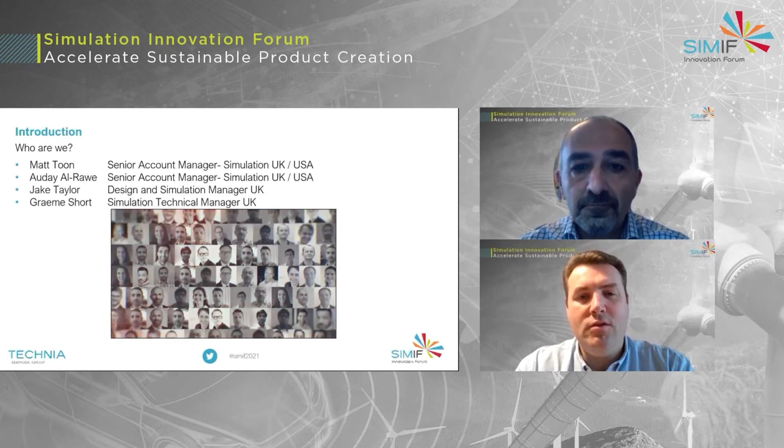As part of over 40 simulation engineers within the TECHNIA Simulation Centre of Excellence, our role is to support customers with simulation solutions in the UK and the USA. We support the full simulation solution portfolio from Dassault Systèmes to include structural, thermal, CFD, electromagnetics, optimization, etc. Our approach is always driven from our team's experience, as their day job is using the tool sets to solve real engineering problems.

Also joining us later in the presentation is Graeme Short and Jake Taylor from the TECHNIA Simulation Centre of Excellence. Today we are going to talk about why you should use simulation early in the design process and why this practice will deliver far better results in the long term.

Let's have a quick look at today's agenda. We will start by setting the scene, then we will go into what is MODSIM. It's not a software application. Why should you adopt this process? Then we get into the benefits and how could TECHNIA help you.

So, who are we? TECHNIA is a global partner for Dassault Systèmes with offices worldwide. As mentioned, TECHNIA have put together a Center of Excellences, which include simulation, engineering, and manufacturing, which all specialize in these fields. These are made up of colleagues who practice their profession daily and sharing their valuable knowledge with you, our customers, either as a service or support and training for our software solution.

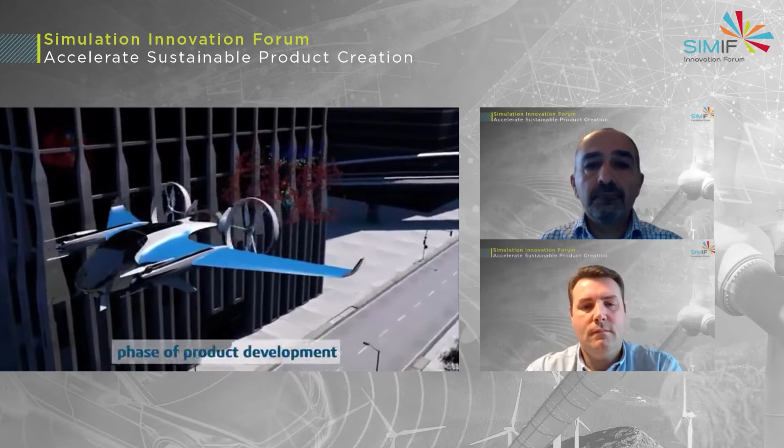Experiencing your design is made possible through seamless concurrent engineering and simulation that begins at the earliest phase of product development, enabling you to deliver the right product at the right time.

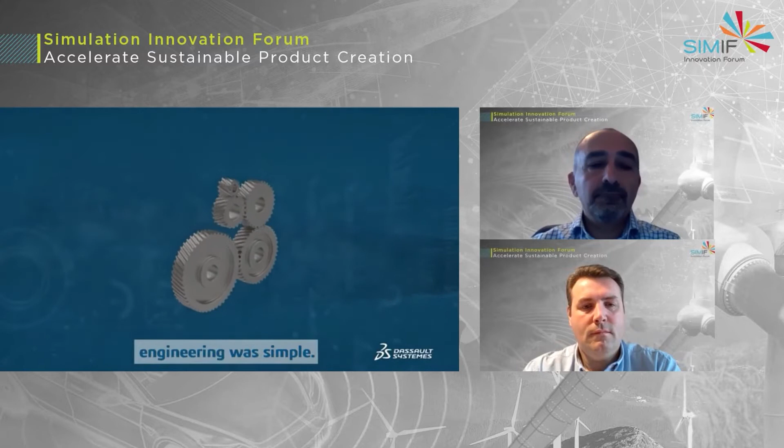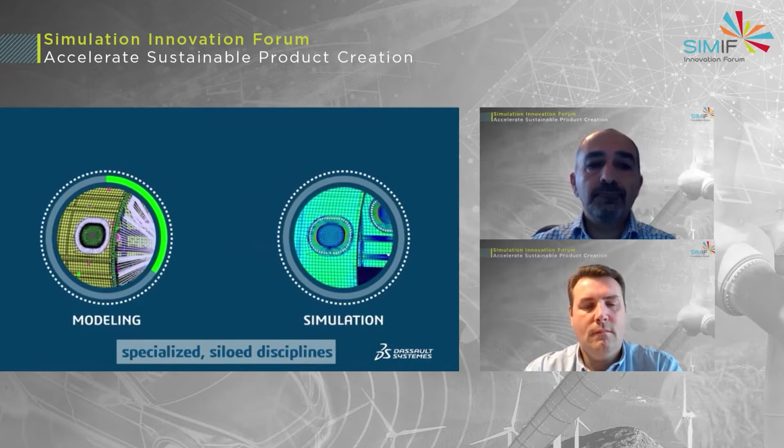When products were simple, engineering was simple. However, the increasingly complex connected products of today require engineering teams to stay one step ahead by understanding and predicting product behavior as early as possible in the development process. CAD and CAE technologies have evolved. However, engineering practices and workflows have not kept pace. Most modeling and simulation functions today perform as specialized, siloed disciplines, with each using separate, often incompatible software tools.

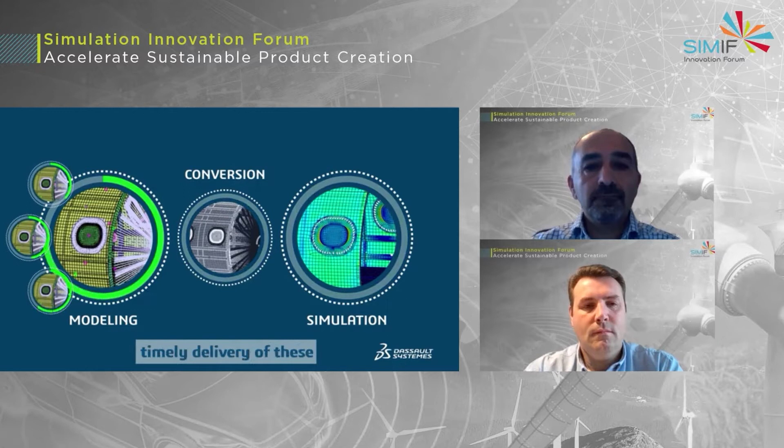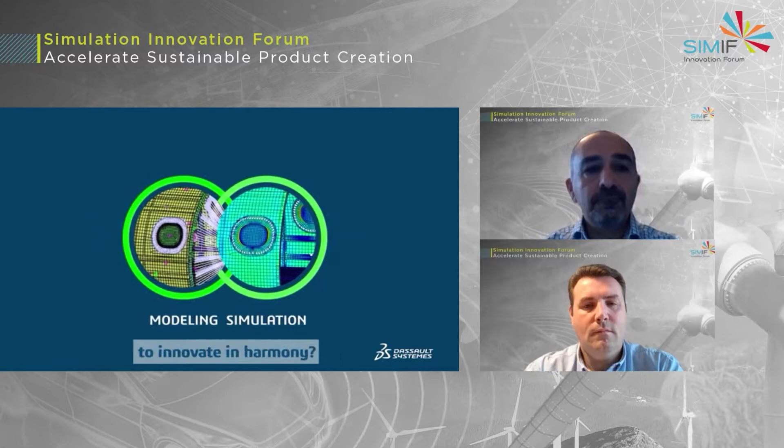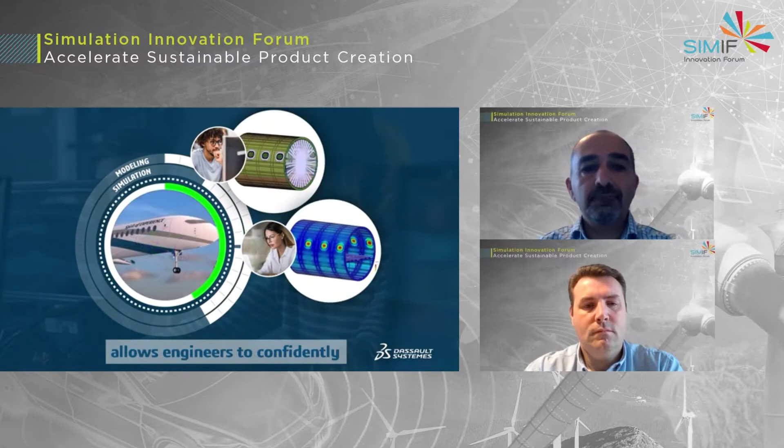When a designer shares information, that information must be translated and reworked into simulation software. Rigid handovers to analysts slow down collaboration, disrupt innovation, and prevent companies from timely delivery of these more sophisticated products without additional resources. What if you could break down the walls between disciplines and free analysts and designers to innovate in harmony? Integrated modeling and simulation, or MODSIM, makes it possible. MODSIM is a lean approach to engineering that can revolutionize the productivity of engineers and product teams. Seamless engineering, using one model and starting at the earliest phase of product development, allows engineers to confidently deliver the right product at the right time.

So at this stage, we need to clarify something. MODSIM is not a software tool, it's an engineering process.

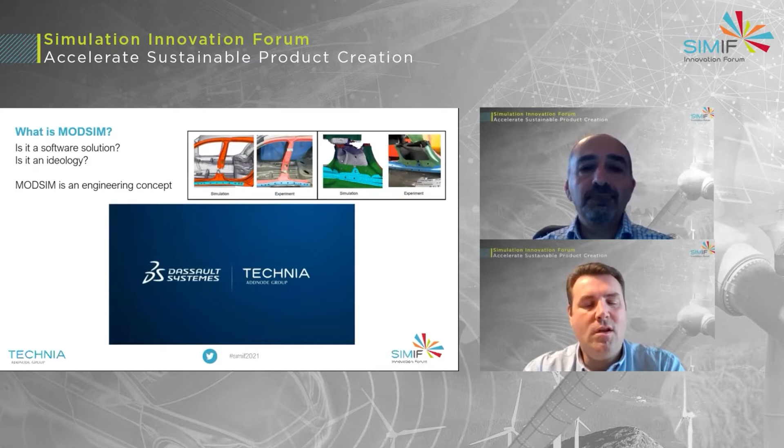If you think about your own project, then there's still lots of money committed early. However, only some 20% of time and cost has been expended. This is because fundamental decisions are made early: geometry, material, system technology, and architecture. Again, if you are making design decisions, are you validating them?

For example, you design a metal component that is stamped or starts off as a flame cut blank. Are you considering the trauma the material has gone through to make that part, and then be confident that the yield of the steel has not been compromised and can stand up to the environment you have designed it to perform in? Have you inadvertently engineered in a weakness due to the manufacturing process? My colleague Graham a little later is going to show how one feature can be the weakness in a design.

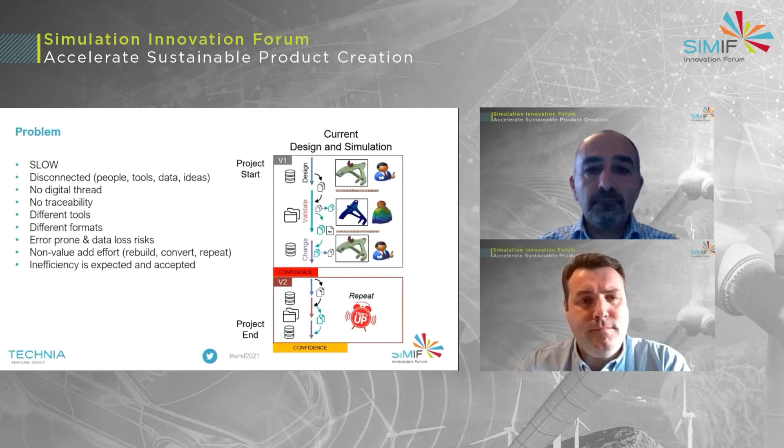So let us map this onto our earlier chart. It's obvious now that engineering changes to material, design, and manufacturing are costly - the later you need it or must react, there are high risks due to weakness found late. The cost goes up, and end consumer confidence in your product drops, especially when it hits mainstream use, like thousands of products being recalled to change brakes, brake pedals, airbags, sensors, etc.

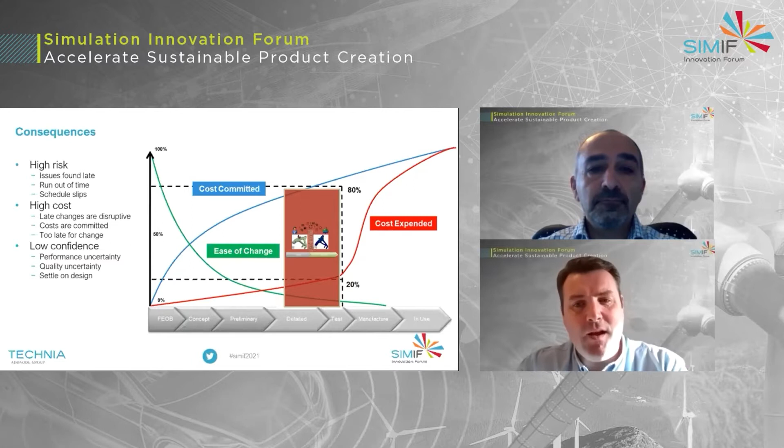Exactly, Ali. Well, I know when I read product reviews and make a purchasing judgment from them, these are heavily swayed on those performances and that reliability. And I'm sure I'm not alone in this process.

Okay, so what's the answer? Good question, Matt, I'm glad you asked. Let's look at an alternative workflow to the one we have shown earlier. We have already highlighted if you could validate design changes early with simulation, then that's a benefit.

If you could use tool sets that work with your CAD design team, manage the data, and link everyone together, then using simulation at the start and during the design process is a reality. This will then allow you to drive innovation using simulation.

If you could run a study looking at the load criteria as well as manufacturing process, considering the structural possibilities for different design choices as part of the design process, then with no doubt you are going to get a better, more robust design than previous ones. Even if you have to make a prototype, you are confident right at the beginning it's going to work and pass.

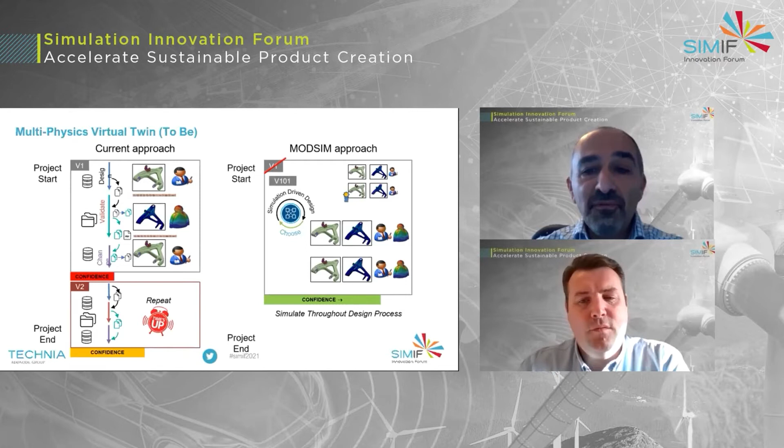So rather than doing a couple of reviews and reworks of the design, you're constantly moving the design forward. So you can end up with, say, version 101, which you are confident is your best and most robust design. Yes, absolutely, as you are improving with every engineering validated decision.

We've discussed how a MODSIM approach to a project has time-saving benefits. If this all seems daunting, then you're not on your own. As previously mentioned, TECHNIA daily practice the MODSIM process and can help you in your adoption. To get you up to speed and proficient in the new way of working, TECHNIA have the expertise and know-how to help you adopt these best practices. My colleague Jake a little later is going to outline how we can accelerate this ideology.

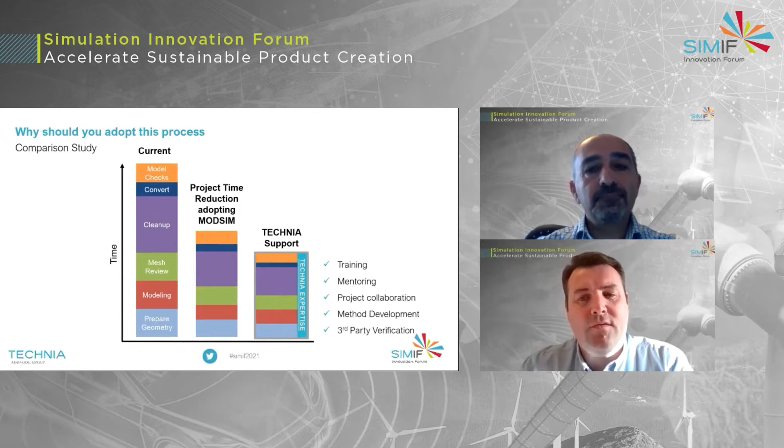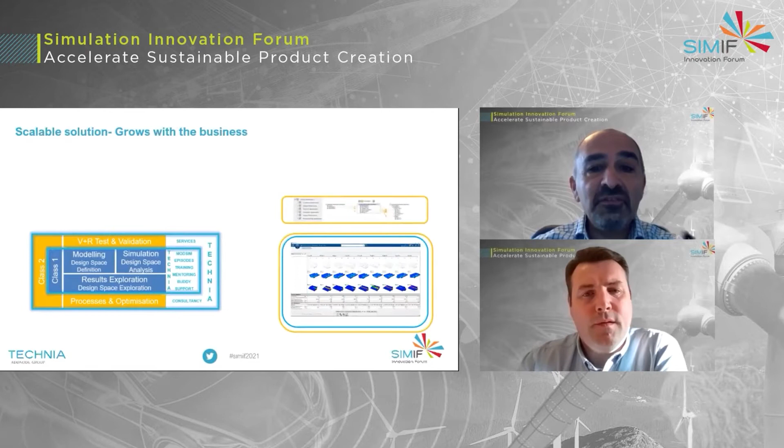So we have just shown how bringing simulation earlier into the design process brings massive benefits. But does this stop here, or does it grow with businesses? In fact, this is just the start of the journey. I will let Matt explain more.

You're quite right, Ali. There is so much more we can build on. We mentioned being able to do lots of iterations of the design, and this can be automated and optimized. In the life science industry, for example, in silico or virtual modeling brings testing and the digital twin to the levels where your final physical test is a known result.

You need to be able to control and monitor your design changes. And this is where the benefits of a PLM solution, using the 3DEXPERIENCE for example, can add value to the wider organization.

Talking of the wider organization, project management is key. Once the design is ready, it will go to manufacturing and production. All of these follow on. This can be seamlessly managed, and TECHNIA have the expertise in the wider center of excellence, as we mentioned earlier.

So, what does this mean from a software point of view? As you can see from the graph, we can keep it very simple, but the most important takeaway is it's scalable for the designer's needs. Don't forget, TECHNIA is here to guide and support you through this whole journey. I will leave this up for a few seconds just for you to digest. But let me just map where Abaqus sits on this.

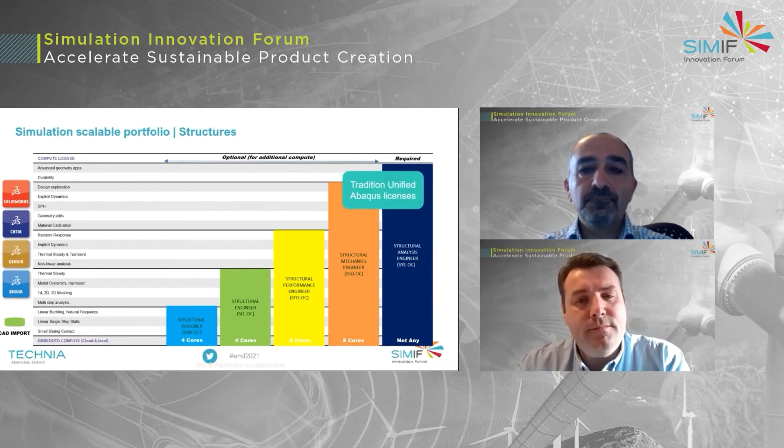Then you can see how this all sits together. Ali will now map the scalable solution to a wider business need.

Indeed, Matt. Let's take a quick look into our simulation role portfolio that forms the basis of all of our solutions. The software configuration is mapped to industry processes and solutions. As you can see, some of these roles are more targeted towards designers and product engineers, while others are targeted towards analysts.

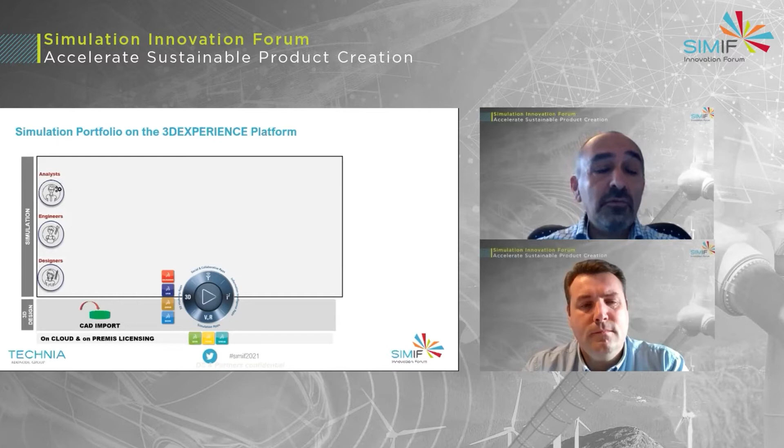We have a scalable native portfolio for core structures and durability to fit with the appropriate engineer's role and skill. We offer specialized roles for composites and manufacturing, material calibration, while model building and meshing is included with most physics roles. We also offer a standalone role for model build.

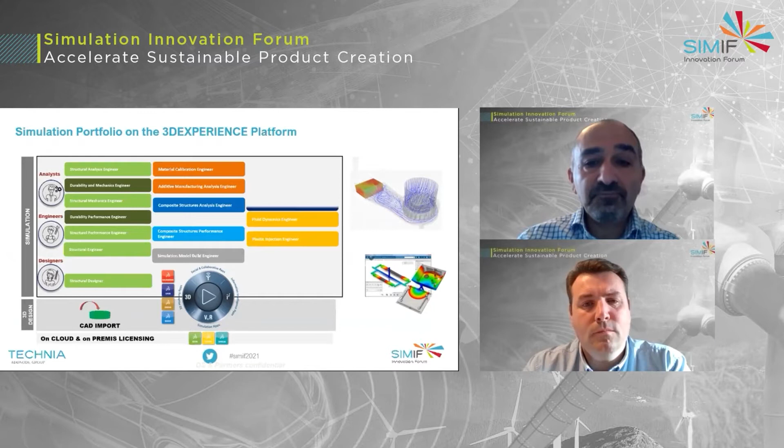We offer two native fluids roles, one for general purpose mainstream fluid markets and another for plastic injection molding solutions. We have a new electromagnetic engineer role, bringing low and high frequency electromagnetic simulation to the platform.

We have a great portfolio for generative design for structures and fluids, where designers can optimize the weight, stiffness, and performance based on the manufacturing process used. We have roles for simulation process and optimization.

Apart from the simulation role, every simulation starts from the design. The platform has native 3D design apps from SolidWorks, CATIA, but to be honest, any CAD system will work and can be used for MODSIM. The beauty about all of the above roles is they all work from the same database and no import or export is required. They are also available on either cloud or premise.

So now we've set the scene. Let's look at this from a technical point of view, starting with a simulation approach followed by a designer's approach. I'll hand over to Graeme for the next step.

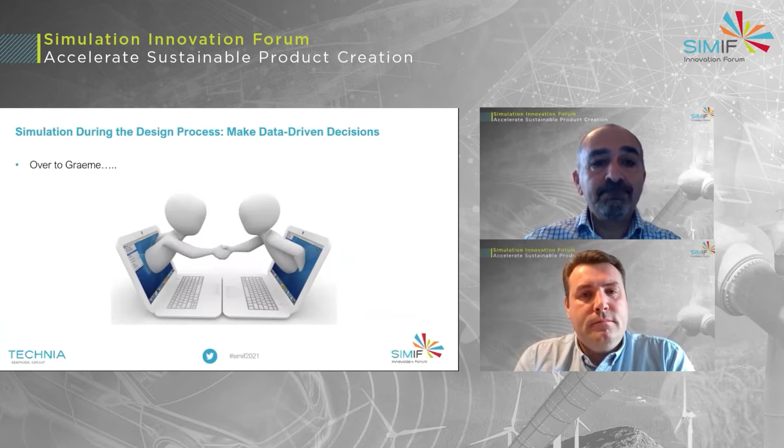Okay, so thanks to Matt and Aude for articulating why MODSIM as a process and an ideology can help make better products more efficiently. Have in mind all that they have said around the technical and business case as we now move on to look at how MODSIM could be implemented in practice.

In this next section, I want to take a look in a bit more detail at the kind of simulations that can be performed to generate information that is useful to inform design decisions early in the design cycle. The motivation for this is to minimize but not eliminate validation tests, prototyping loops, and mule testing, and so get to the solution faster.

This is the agenda for the next 20 minutes or so, during which I hope to convince you that the tools available to do this are both robust and accurate, and also simple enough to use that any overhead to the project development timeline is an investment that will pay for itself later on.

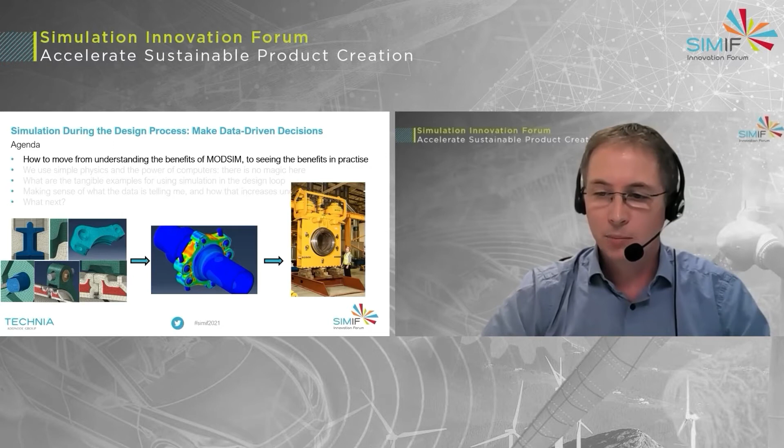Firstly, we'll explore how we move from the abstract benefits of MODSIM as a process to where it can be most effectively deployed during the design cycle, looking at how understanding more about each component and how they work together ultimately leads to a better product. Then we'll look at what exactly is happening and if we can believe numerical models of reality at all.

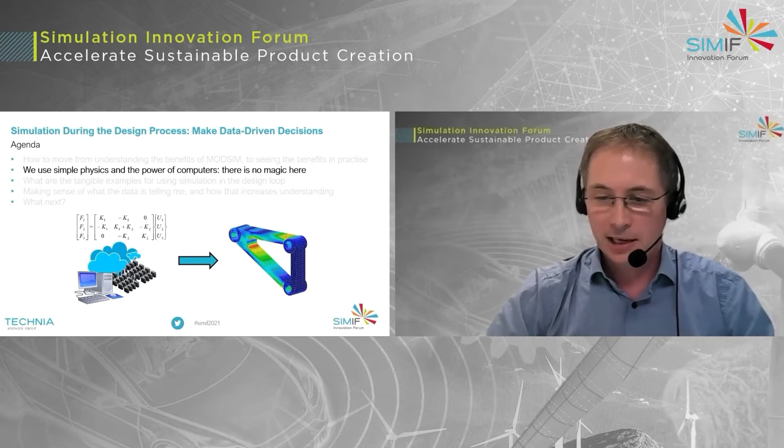Don't worry, there's no maths equations, complex science, or textbooks. We'll look at a very simple example comparing structural simulation tools with a simple physical test, focusing on why and where structural simulation tools are only an approximation of reality, but also identifying how they are more than accurate enough to be a useful equivalent of a physical test, allowing significant design decisions to be made with confidence based on the structural performance.

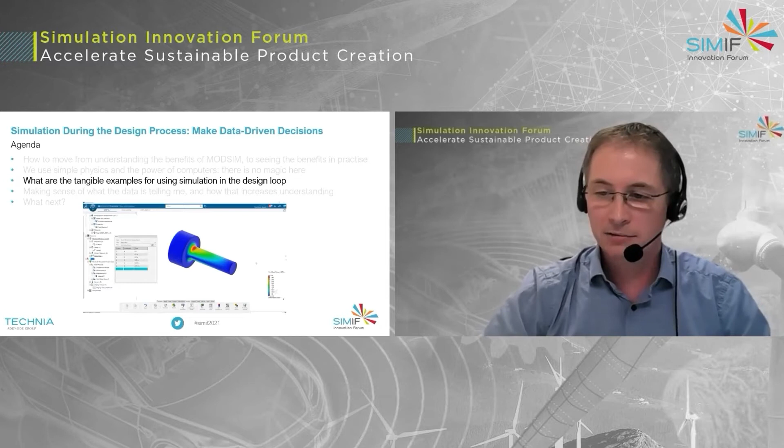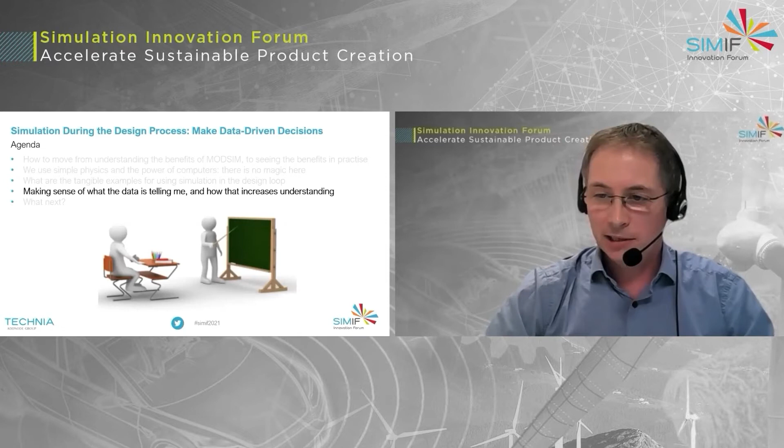Then, having convinced you all that this stuff actually works, I hope, we'll marry up these first two points to demonstrate examples of where simulation can bring real value to making decisions by adding structural performance data to back up the choices that need to be made to progress a design from idea to a production item that will perform as intended straight out of the box. While we're doing that, we'll consider not just how we get more data, but how to understand what it can mean and how to make decisions using it.

And finally, if that ticks a lot of boxes, I'll hand over to Jake, who will talk about how TECHNIA can help you deploy this mindset and tools at whatever level is right for you.

So let's look at the first of these points. How do we move from understanding the benefits of MODSIM in an abstract way to actually seeing the benefits in practice? This could be in terms of reducing time to market, lower development costs, or simply a better product, or a combination of all three if we do things well.

I think Matt and Aude make a compelling case for including simulation as part of the design cycle, not just as a specialist tool for final validation of the near production design. So how do we move from a good idea to seeing the benefits realized in practice?

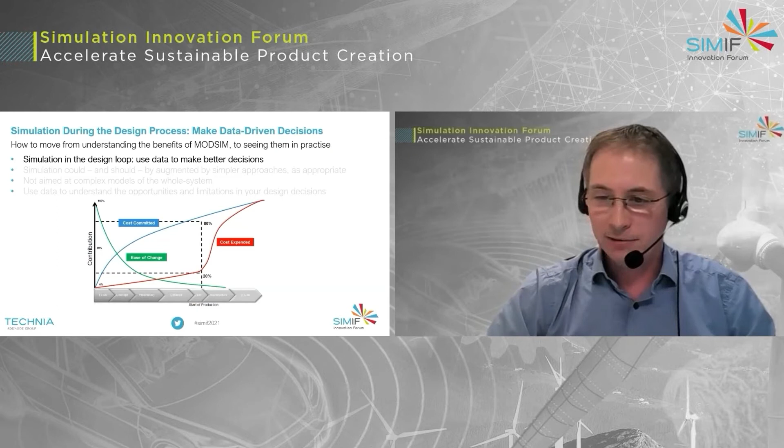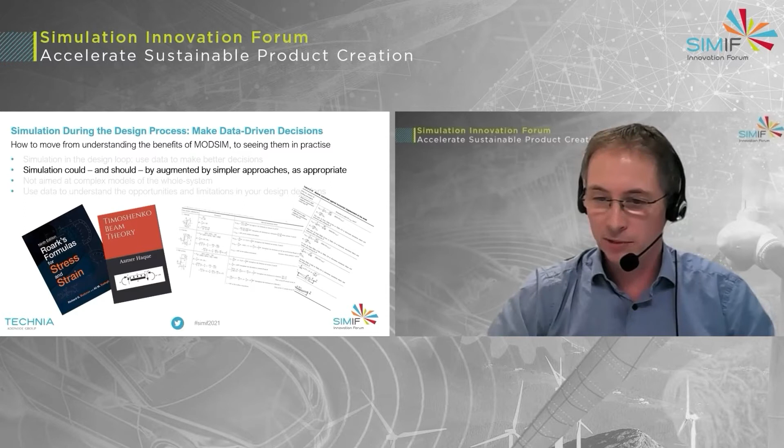As has been mentioned earlier, in the context of this presentation, we're talking about building numerical structural models based on the evolving CAD geometry of the product. This may be preceded, augmented by, or run in parallel with hand calculations or other methods to inform design decisions around the structural performance and validate the results being produced by more complex methods.

These simulations are likely to be at component, a small subassembly level, perhaps focusing more on the comparative and qualitative effects of changes in your design on the overall structural performance, rather than getting too deep into the details of every interaction, loading action, or material behavior. At this stage, we're still very much in the 80-20 stage of knowledge in terms of gathering enough data to try and understand a large area of the performance envelope for a small amount of effort.

It's also worth saying that while understanding the structural behavior of a product is undoubtedly important, there's no reason why simulations of all the physical phenomena relevant to the performance of the product can't be applied up front in the product design. That could be fluids modeling, electrical systems, electromagnetic simulations, as well as whole system level models.

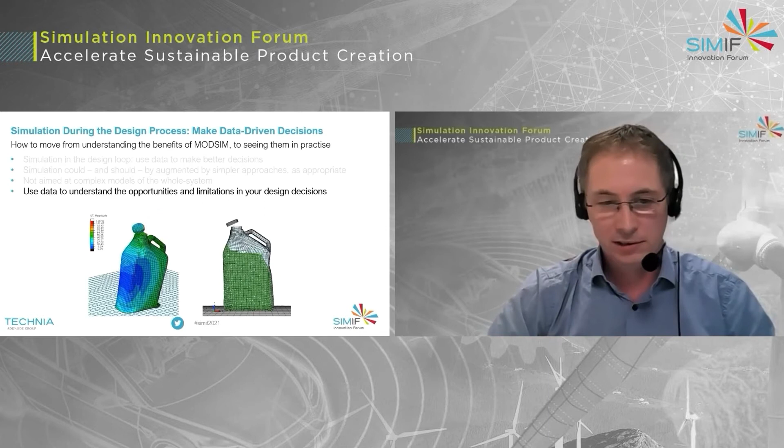This is all very compelling, you might be saying, but how can I trust that my model matches what I see in reality? At a more basic level, can I rely on that data from simulations to be as useful as physical tests? The honest answer is that it depends on how good your model is at capturing all of the physics that is in action in reality when performing your test. And I think you can appreciate the amount of physics at work in the example we show here.

A corollary of that statement is that the more complex your test, the more complex your model has to be, and the more likely that it won't match reality first time.

The flip side of that statement is that the simpler your model is, the more likely it is to be a good proxy for reality without extensive validation. The underlying physics for material mechanics and the methodologies for solving the equations that define these models are sound and well developed. Couple this with the power of computers to do the heavy lifting, and the ability to solve ever more complex models of reality exists.

Or, as we want to advocate here, you can use the power of the tools and computers to build and solve simple numerical models very quickly indeed. This doesn't unburden the user of a responsibility to consider all of the input assumptions and the results with a guilty until proven innocent attitude. But the simpler model, the less modeling decisions need to be made, and the lower overall complexity means there is more chance of the model providing useful results quickly. This is the pretext for a MODSIM approach to deploying simulation alongside design.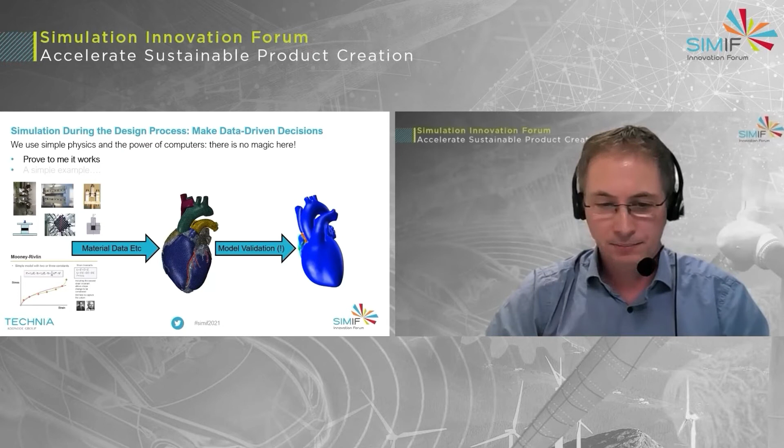Still don't believe me? Well, I'll prove it to you. Let's take this simple structural problem of a bar of steel subjected to some bending load. We want to know how much the bar bends at a given location for a given load at another location.

This isn't a contrived validation example from a software supplier. This was set up a few days ago as a blind test for the purposes of this presentation in a secret test facility in Oxfordshire. The steel bar is of a known rectangular section. It's been clamped to a workbench on what we are assuming to be a relatively rigid foundation, and a load is applied at a known position along the bar's length from the clamping point. The vertical displacement due to that applied load is measured at another axial location.

As physical tests go, it doesn't get a lot simpler, but there are still things to think about when extracting results for even this problem.

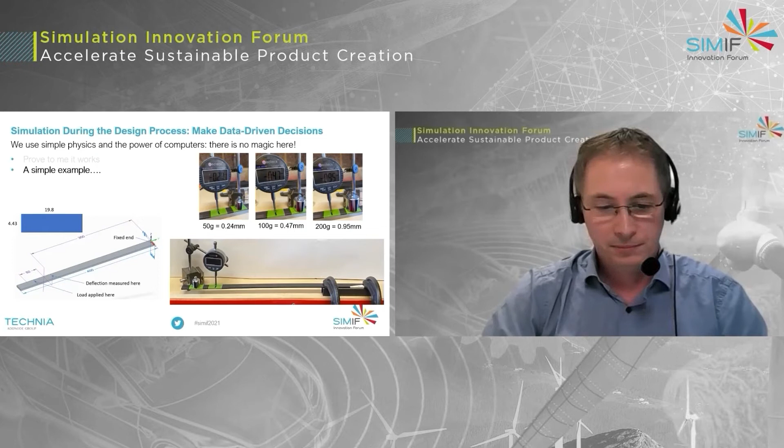Geometrically, the problem is easy to define. The bar has 3 primary dimensions and 2 additional reference dimensions for the load and measurement points. The CAD model to define this in 3D will be the work of a few seconds. When it comes to defining the structural simulation, we need to think about a few other things though.

How the bar is fixed is an important consideration. One of the clamps has been placed adjacent to the end of the steel support, so it's probably reasonable to assume that all of the bar restrained by the clamps cannot move. As such, we don't need to model that and can assume a fixed boundary condition adjacent to the clamps. The material under the clamps, we assume, cannot move, and so doesn't affect the deformation of the bar elsewhere along its length. This fixed boundary is an idealization. Nothing is infinitely rigid in reality, and neither are the clamps. But the clamps are very stiff relative to the bar, so it's a good enough assumption for now.

At the loading point, the mass acts over a finite region, centered on the loading point itself. We could model the mass and its interaction with the bar, but that would likely be overly complex for our purposes. We can work out the force the mass applies to the bar and apply all of this force at a single point, distributing it along a line across the bar if necessary. Again, this is an abstraction of reality, as no force can be applied at a singular point, but the bar deflections are relatively small, and we're not interested in the behavior of the bar local to this point. So again, for our purpose, this assumption is good enough and simplifies our modeling considerably.

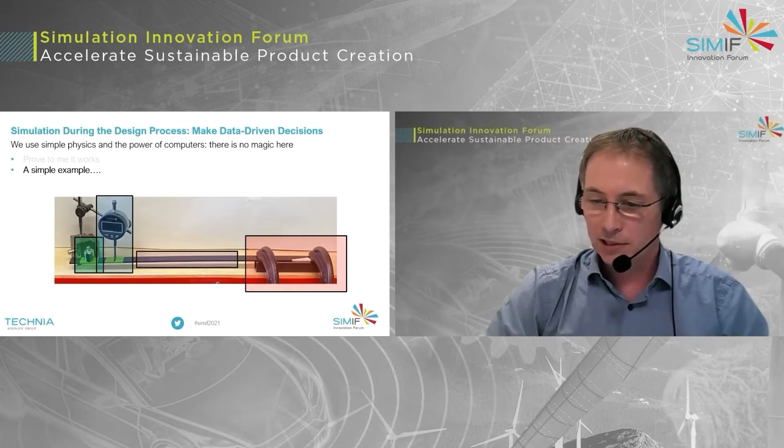Recording the output from the model at the measurement point is simple to abstract, as we can imagine that the probe of the digital gauge acts over a small area. And finally, we have to consider the material response. Handily here, we've done our test first and shown that the displacements are small and the response is proportional to the applied load. So we can assume the material is linear. Being steel, the linear elastic properties are readily available.

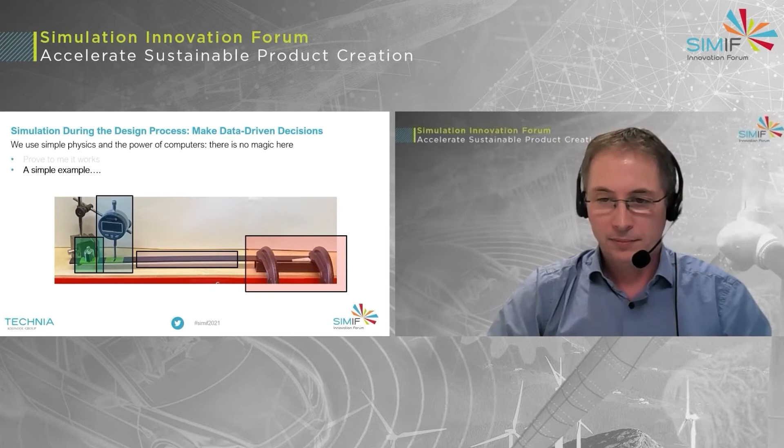Having thought through the problem and rationalized these assumptions, we can now start building our model of reality. For this demonstration, we're only going to replicate the test with the 200-gram mass on the end. But once the model is built, it would be a very simple change to modify the applied force and repeat the simulation for the other two test conditions. This highlights the point that if MODSIM is your mindset, then designing physical tests so that you can take advantage of features like this, where changes to your test scheme are also easy to implement and assess in your simulation, further improves the overall process efficiency.

In this case, we're going to use the Abaqus solver technology and build our model in Abaqus CAE. The geometry of the part is so simple that we can very quickly build it natively in this tool and then start applying simulation features in a logical way.

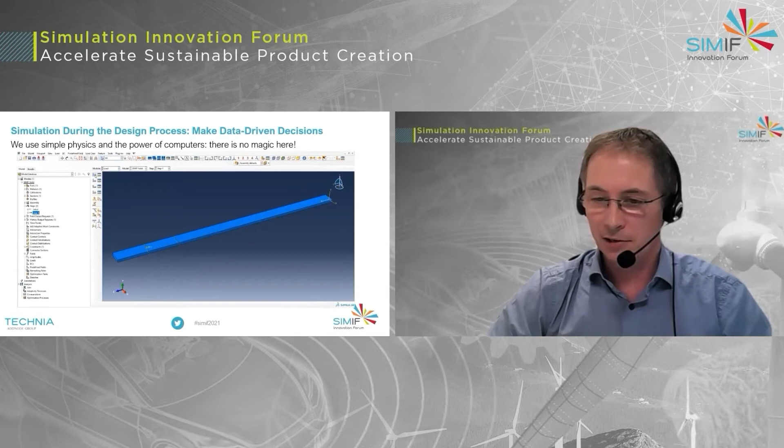Once we've defined the geometry of the beam from the restrained plane to the end of the beam, and partitioned the geometry to create convenient points to apply the load and measure the displacement, we can assign the elastic material properties of steel to the geometry.

Next, we can create a point at which the concentrated force will be applied, and then the coupling that will distribute this force across the width of the beam at the loading plane. We then create a loading step as the container to hold the definition of our loads, boundary conditions, and output requests for the loading history we want to analyze.

In this case, our loading history represents the single step for the 200-gram mass being applied to the beam, but could be more complex if required. Once this is defined, we can apply a force equivalent to the 200-gram mass and the fixed boundary condition at the end of the model adjacent to the clamps, which we will assume to be fully restrained.

After that, we can mesh the model, assigning appropriate element types as we go, configure the job for the compute resources we have available, and run the simulation. For the size of this job, the simulation time is on the order of a few seconds on a desktop PC.

With the simulation run, we can start to look at the results by removing the portion of the beam at the free end up to the plane where the displacement is measured in reality. The peak deflection on our displacement contour plot will be equivalent to that measured on the digital dial gauge during the test. Reassuringly, the results indicate the predicted deflection of 0.96 millimeters compared to the test of 0.95 millimeters.

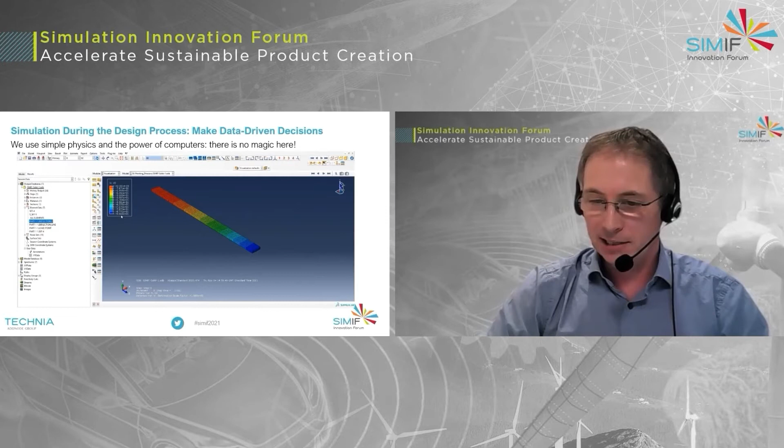It's important to note that a simulation and test as simple as this not only validates that the simulation we've performed and the approximation made in building that model is a good approximation of reality, but also verifies the underlying solution mechanics of the solver.

Indeed, this problem is simple enough that this behavior can also be tied back to a closed form hand calculation to provide a third set of evidence to verify the test if needed.

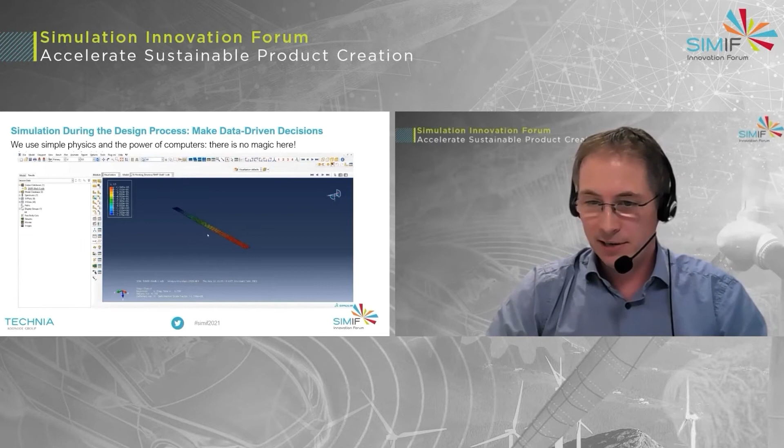Now, while this problem may be simple enough to solve in 3D, both in terms of the geometry being simple and the solve time being very fast, we can take advantage of further geometric abstractions of our physical geometry to both speed up the simulation further and possibly add more flexibility to play with what-if scenarios.

We could abstract our 3D beam to a plane of shell elements where the thickness is another variable that we define as part of the model and can be tuned as it's no longer explicitly part of the geometry. If you have a stiffness or deflection target to meet, rerunning the model and changing the thickness value is simple and quick.

But back to this problem though, we can see that even when the problem is abstracted to a simpler form, the results are still the same as the solid model and the same as the test result. We don't have to stop there though.

For a little more effort in geometric setup, we can abstract our test specimen further to 1D beam elements. Now we need to provide geometric information about the width and thickness of the section.

Again, while this adds a little more complexity to the initial model setup, this is balanced by the improved speed of the solution, and all the section dimensions of our beam are now entered as part of the model setup and so can be adjusted if needed.

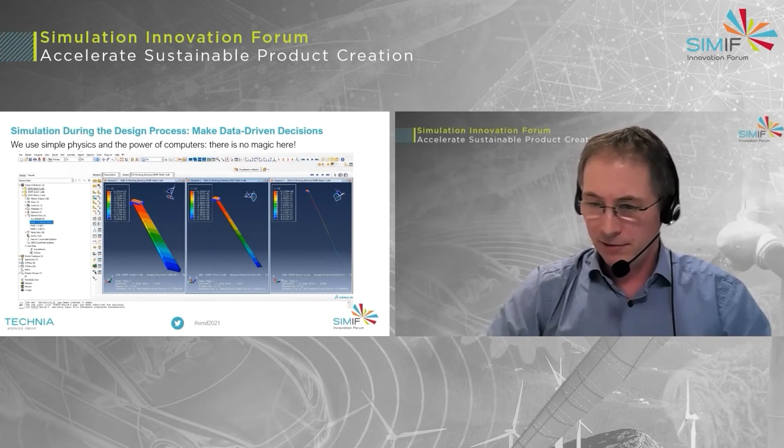Indeed, there's no reason to be limited to the rectangular section anymore. All set up, solved and evaluated very quickly in the digital environment.

But those possibilities are for a real design study. Here we're just looking for confirmation that an even simpler abstraction of the geometry is still valid, and we can show that it is. When we compare all three cases, we can see we get the same result, but with varying levels of user input and model flexibility that may help us explore the effect of other variables.

All right, I'll admit that in this case, a hand calculation would tell you all you need to know, but the geometry wouldn't have to get much more complicated, with different thicknesses along the length perhaps, before hand calculations become problematic and a structural simulation looks like the best solution.

The point of that is that most real world parts are not as geometrically simple or loaded as simply as this example. Therefore, while hand calculations may be able to verify rough order of magnitude of displacement or stress, a structural model will often be required to resolve these parameters in sufficient detail to get enough data to make the best decisions.

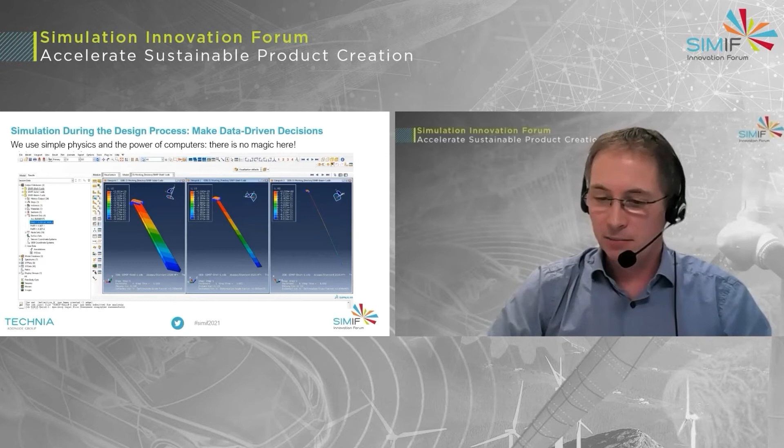It's also worth saying that with a hand calculation or physical test, you're limited to extracting data at a single point, or the number of channels on your data acquisition system, and inferring from that how the rest of the part is behaving. With simulation tools, you aren't limited to a single point. We've validated our model against a single measurement, but now we can go on and pull out data from the model about how all of the structure is behaving, generating more value from the simulation by looking at the total response of the part.

So my aim from the previous section was to convince you that relatively simple simulations represent both a viable tool to generate valuable data, and that the process is quick and efficient enough to embed in the product design process to generate that data as and when it's needed. The videos in the previous slide show the model being built and solved in near real time.

That's great, but my products are more complicated than the steel bar. How can I apply this practically, I hear you say? Whilst that is surely true, I'm glad you asked that question, because we now also need to explore at what point in the design cycle these simple models are deployed, and when a simple model of reality is still useful.

So thinking about structural simulations you might consider through the complete life cycle of a product, from ideation through detailed design and engineering, all the way up to possibly considering end-of-life disassembly and decommissioning, we could come up with a list that might look a bit like this.

This list builds through the design process where the form of the product is taking shape and being married to the functional requirements, and consequent decisions are made. This will include thinking about materials and manufacturing techniques and the assembly process of the complete product so that it's ready to supply to the end user.

All of these choices have consequences on the structural performance of the product, which may or may not be significant, which should be considered to understand how close to the edge of performance the product is operating at before functional loads are considered and too many choices are set in stone.

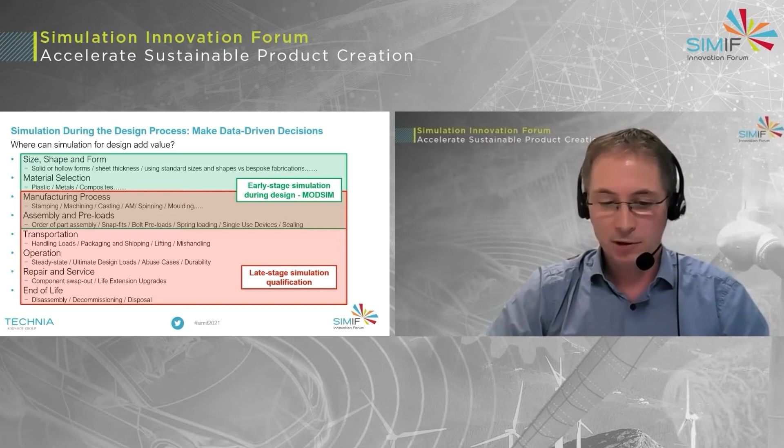What does this actually mean in practice? Well, let's look at a tangible example. Imagine we have this part, which is a step rod known to be loaded in bending in its assembly. In conceptual terms, this is only a few steps more complicated than our validation example of the rectangular bar in bending.

But now there are a few more choices to be made, as unlike the bar where we started with a test on an existing beam to validate the simulation, this part doesn't exist. So we are purely using simulation data to drive decisions about the design. In this case, we will analyze the part using a simulation app on the 3D Experience platform.

As such, the design of the product and this component will be evolving in a collaborative space on the platform, so we can access the part directly from the designer and place a freeze on the geometry we will work on, perhaps while the design is also still evolving in parallel.

While some geometric variables are fixed by other requirements, no doubt some can be changed. Perhaps the fillet radius between the two diameters is a decision to be made, because the designers are aware that as the part will be subjected to bending loads, the fillet will be an area of stress concentration.

The part has been modeled with the properties of steel, and for the purposes of this demonstration, let's imagine the allowable stress from the performance specification is set to be around 300 MPa.

As we can pass the evolving geometry from the CAD app directly to the simulation app in the same environment, in the time it's taken me to explain the problem, we've already meshed, loaded, restrained, and analyzed the part, and can see that the stress levels in the fillet are indeed beyond the allowable stress for the material.

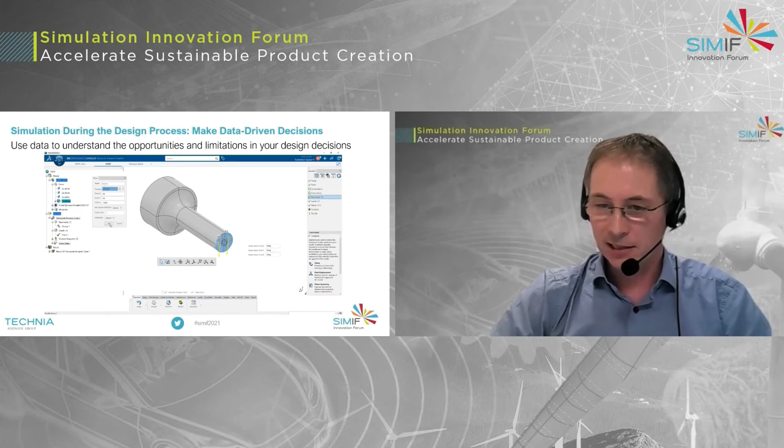We can see the stress is too high in the nominal fillet radius size, so we can first explore the effect of changing the fillet radius to the largest size the step in the bar can accommodate. This may not be practical, but shows what the best case scenario looks like within the confines of the other geometric variables. As the underlying geometry of the simulation is native CAD geometry on the platform, modifying the fillet radius...

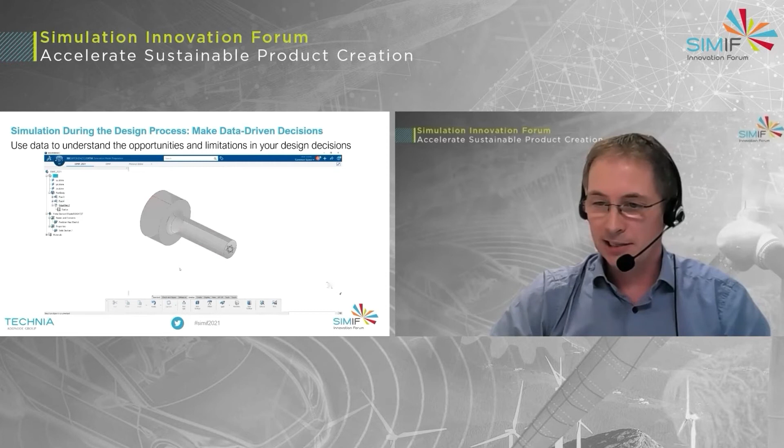Updating the simulation and extracting another result is easy and gives us another piece of useful data, which shows the stress is now just below the allowable stress.

Again, important as the absolute value is, it may not be as valuable as the trend in these results, that significantly increasing the radius doesn't significantly reduce the stress. And so this region of the part is a genuine area of concern.

To extract as much value as we can, we could also analyze the smallest practical radius dimension to check what the stresses are over the full range of geometric possibilities in this feature.

When we do this, we see the calculated stresses are above the notional allowable stress, as expected. More than that, we see that the spread of the calculated stresses is at a high level and over a tight range for the full range of geometric options available.

At this stage in the design process, rapidly being able to understand all of this absolute and relative data is incredibly valuable. So what does this all mean?

Well, in this simple example, where there aren't too many connected variables, one way might be to look at the range in structural performance relative to the allowable stress in our example component. If we plot the calculated stress as a percentage of the allowable value for the range of possible fillet radii...

We can visually see what we already surmised, that the spread of the calculated stresses is at a high level and over a tight range for the geometric options available to us. As a result, the window of opportunity and performance is pretty limited for this one feature.

On the other hand, the size of the fillet radius, and so by how much we can reduce the stress level, is restricted by the diameter of the two bar sections.

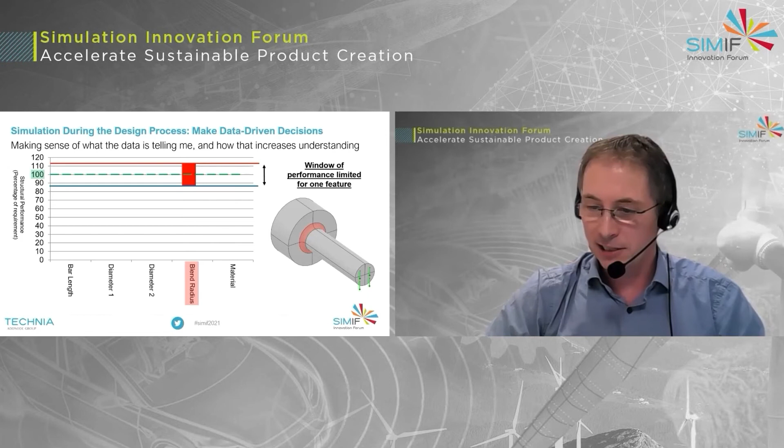Imagine if we repeat the analysis study, changing a variable at a time to explore the design space from a structural perspective, to help us understand where the possibility exists to change other features to open the window of opportunity for the structural performance of our part overall.

If we do that, we might find that changes to other adjacent features themselves have a wider window of opportunity. We can then use this data to start making compromises elsewhere to drive down the stress in our limiting feature.

Within this information, we can start making informed compromises, reanalyzing the part in a series of what-if studies to test the compromises and exploring how to open the window of opportunity for each design variable, underpinned by the confidence in the part's performance based on data which takes into account the complexity of the structural scenario we're interested in.

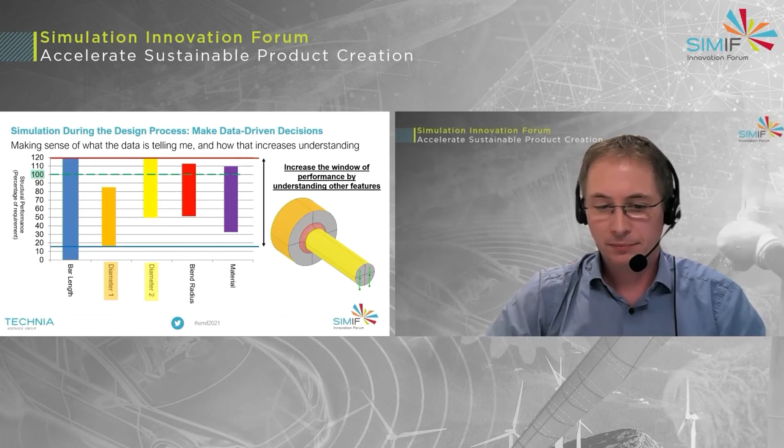While that process is entirely appropriate for our very simple bar example, it's possible that the complexity of the interactions between different design variables makes it difficult to manually identify the best compromise in practical real-world components. This could be especially true if the part is also to be subjected to multiple loading scenarios.

Combining geometry modeling and simulation on the 3D Experience platform means that not only is the data associated with all these activities stored in one place, it is also fully connected to the digital thread of the product lifecycle and is available to interrogate, inform design decisions, and revisit later as needed. This digital thread for the entire product creation process can be stored and managed on the platform, including retaining all key information associated with the simulations and how this was used to inform and support design decisions.

The benefit of all this data in the context of what we're talking about here is that it can be subjected to sophisticated data analytics directly on the platform to help identify the best overall solution automatically.

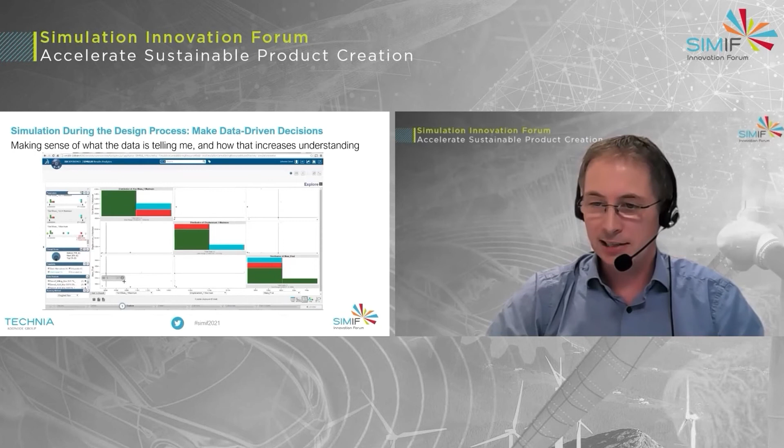In the example shown here, topology optimization has been used to reduce weight and explore geometry options in the part intended for additive manufacturing. But the balance of stiffness, weight, mass, and manufacturability has to be considered to make sense of what the best overall solution literally looks like.

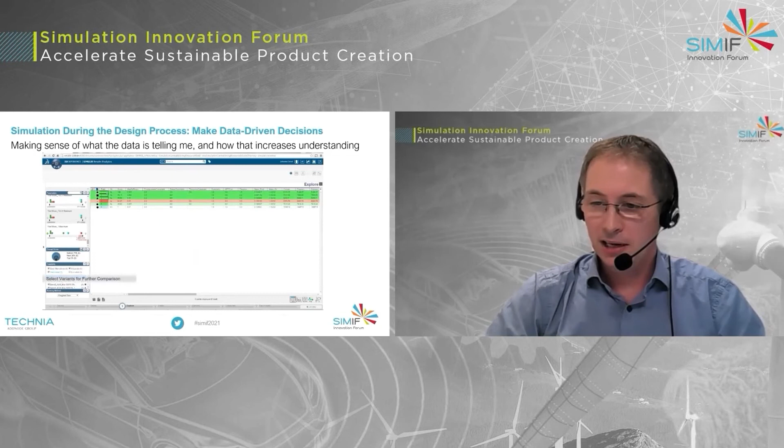Compromises between these often conflicting objectives have to be made. All of the design variables explored in the simulations can be cross-referenced and weighted or prioritized relative to one another. This then allows the different possible geometric solutions and the simulation results from these combinations of design variables to be ranked and compared against the required metrics.

The results of this comparison can be displayed in different ways depending on the audience that needs to consume the data. As well as the summary of the comparison, the detailed output from each simulation used in the ranking exercise is available in the background and can be pulled up to review in more detail if required.

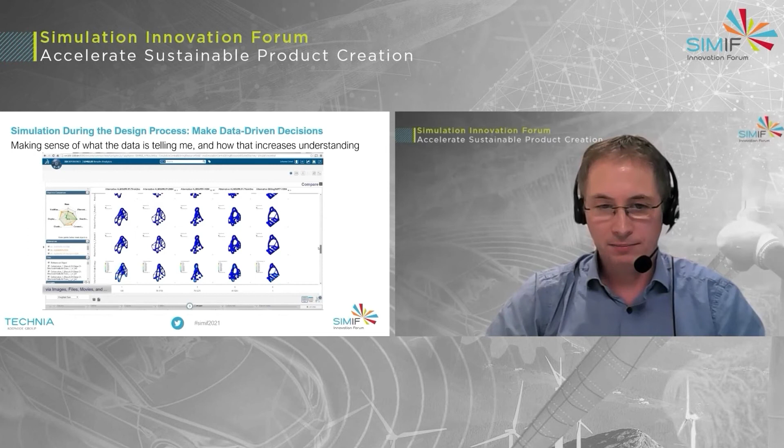But why limit ourselves to geometry? One of the obvious limitations of physical testing is the time, cost, and effort that's needed to be invested in manufacturing the parts to be tested. Not just that, but often the test rig needs to be designed and built as well.

Virtual testing of parts through simulations allows things like material choices to be changed very quickly indeed. The effect of different materials and their particular properties can be evaluated almost as a live activity in the digital world compared to making new parts in a physical test.

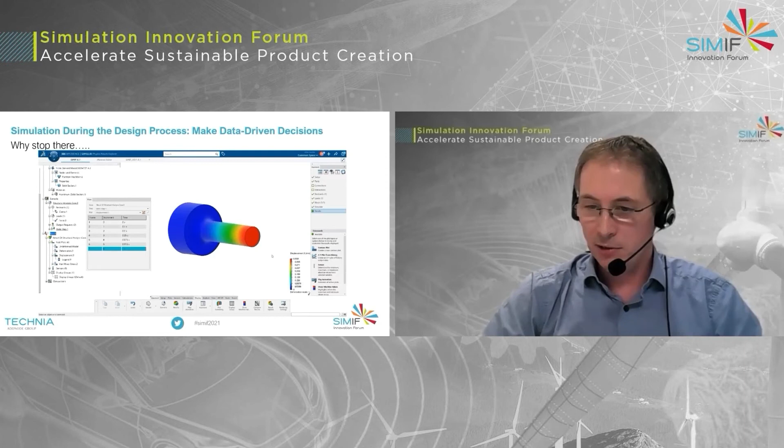Back in our step bar example, we've decided to test the effect of changing the material from linear elastic properties of steel to that of aluminium. This can be achieved in a few mouse clicks and the model is ready to reanalyze.

Clearly, this is a trivial example because, as expected when we review the results, the calculated stresses in the fillet remain the same, but the displacement at the loaded end of the bar increases in the ratio of the moduli of the steel and aluminium materials.

However, the point is to illustrate how easy it is to test a material change when you don't physically have to remake the part. And again, it may not be as easy to predict the outcome of switching material if the part geometry, loading, or the material characteristics themselves were even slightly more complex.

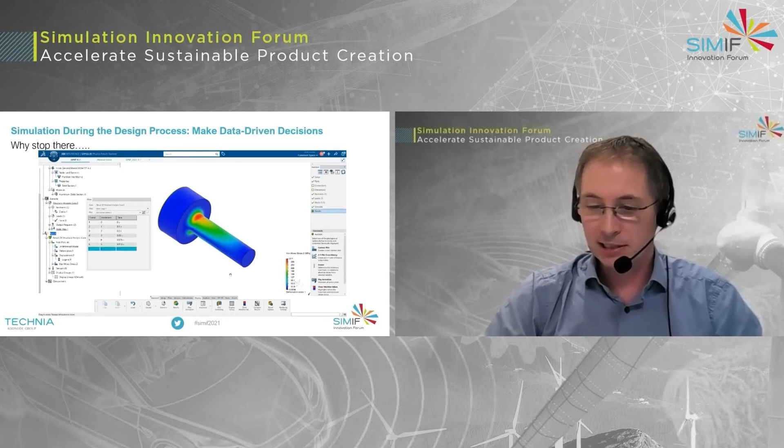Once we can model these individual actions, we can start looking at modeling the build sequence of the product as a whole, to understand how this might affect the way stresses or residual deformations are locked into the assembly, and how that might affect the product's ability to function.

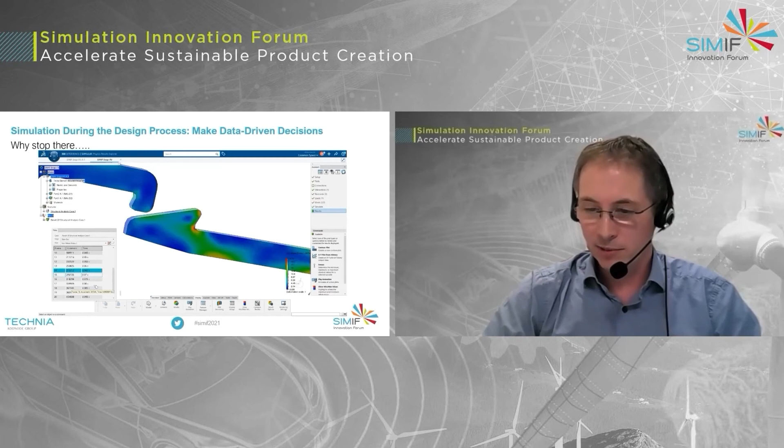At this point we are nudging into the realm of the specialist, but it's okay to stop our MODSIM journey here, as a lot of the groundwork has been done with relatively simple models to create confidence that the product is likely to perform as expected before we come to the formal structural sign-off.

So if I've managed to convince you that these tools are simple enough to use and the process validated enough to provide useful data, then you're ready to see the benefits of a MODSIM way of thinking to improve your product development process in whatever way offers the most benefits. This might include reduced design time, less testing, reduced overall costs, lower weight, less material, better data management, or a combination of all of these and more, leading to better and more competitive products all round.

All achieved through a process of thinking about how your product performs structurally and how it can be optimized at the same time as how it looks and functions, right from the start of the design process.

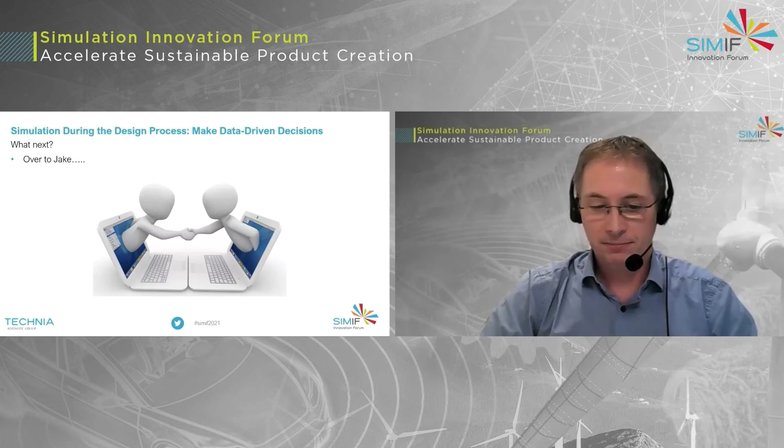So, early simulation and potential process change. We've talked about why you could be looking to change your approach and showed you what tools you could use. So how can you make the best use of the tools on offer? If you were to map your end-to-end process, would it look similar to this, or is it vastly different? Many product developments need to call upon the skills of design and simulation engineers to get the job done.

But why are they still viewed as siloed roles? How can we go about breaking down these barriers and linking our workflow more seamlessly to get the best end result?

The best way to try and incorporate this change initially is to keep it simple. Simplistic models and analyses are also going to give the best early return on investment. Adding complexity takes time, and although it gives you a better definition of the end product, you want to make sure that any early assumptions you've made get replaced with informed decisions, results, or data. Nothing's ever perfect, even when simulated, but ironing out those variabilities at an early stage is a big win.

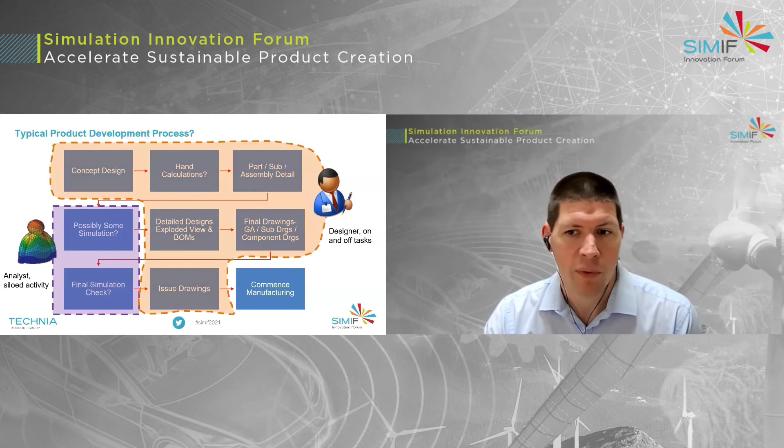Instead of 2D shell elements, you could use 1D beam elements. Anything that takes out nodes, elements, and complexity of a model will likely mean it runs more quickly, and you can make more changes or complete more studies for the same effort. Or, more importantly, you can reduce the time taken to retrieve informed feedback.

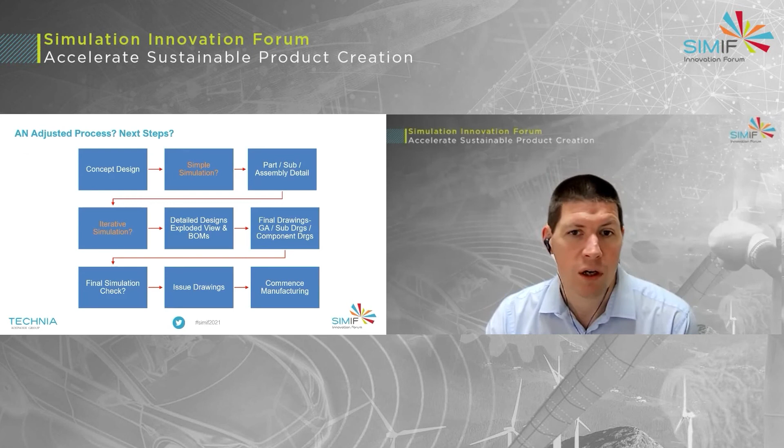To aid this speed and simplicity, why not look to add a basic simulation stage into your design process alongside your concepts? Studies such as this can be set up so quickly that whether they have a positive or negative result once completed, they make an immediate impact on your design direction.

We're not trying to dissuade people from using experts for specific analyses, more to try and democratize the early efforts so that people have more understanding and control on the direction of development before it starts to cost more if mistakes occur. Investing a little more at this stage empowers your engineers, allowing them to create better designs for more suitable products that are likely to reap greater rewards further along the product design lifecycle.

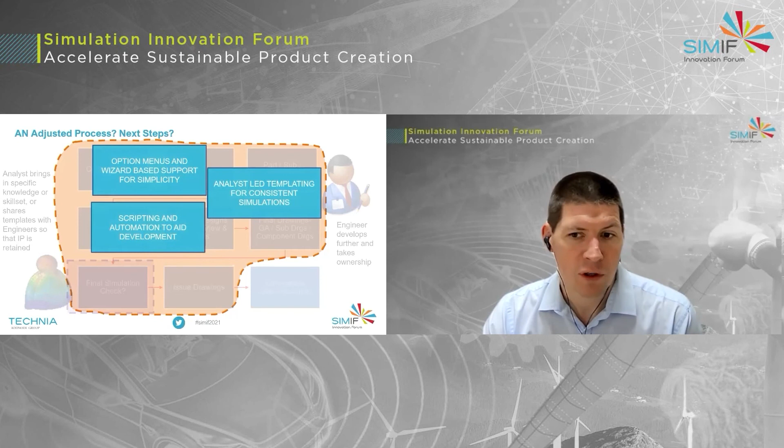Mastering the basics can be simple with the use of simple step-by-step menus, and simulations can be templated by an analyst for an analysis that's run by an engineer. This is to ensure accuracy and development throughout the process. Once your team has mastered that, they can go on to use automation tools perhaps and extend that learning.

So is simulation really required? With the obvious advantages you've heard and seen, you'd be forgiven for thinking that everyone uses this integrated approach. However, often engineers or their managers will give one of the following reasons for their decision not to invest in simulation tools: the products don't break, their performance is satisfactory, and they don't need to improve them.

This is common among companies who are trailing in their markets. Making this kind of statement is a sign that they're not forward-thinking enough to push boundaries, or otherwise they don't have enough reference data to truly assess their product.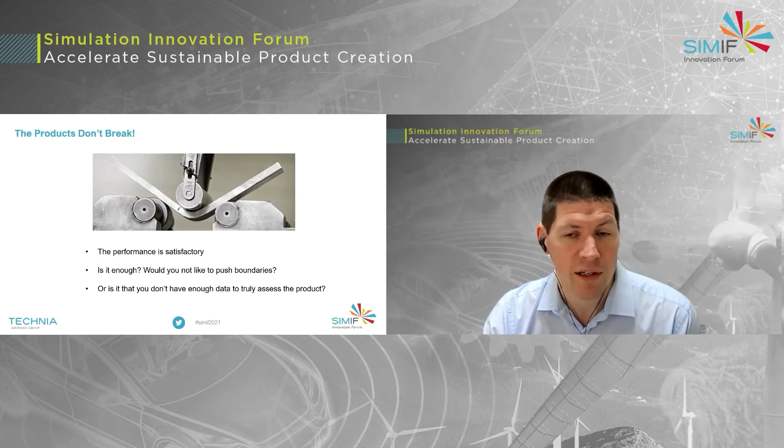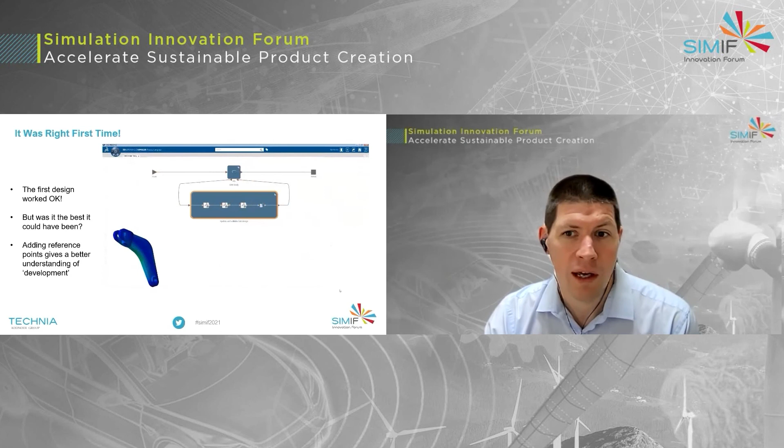Right first-time design: while it's entirely possible to develop a product that fits its specification on the first attempt, it's impossible to know whether this attempt was the best it could be. The only way to assess a product properly is by introducing a range of reference points via iterative development. These reviews must allow it to converge on the best fit result where improvements no longer occur, where developments show diminishing returns for further investment.

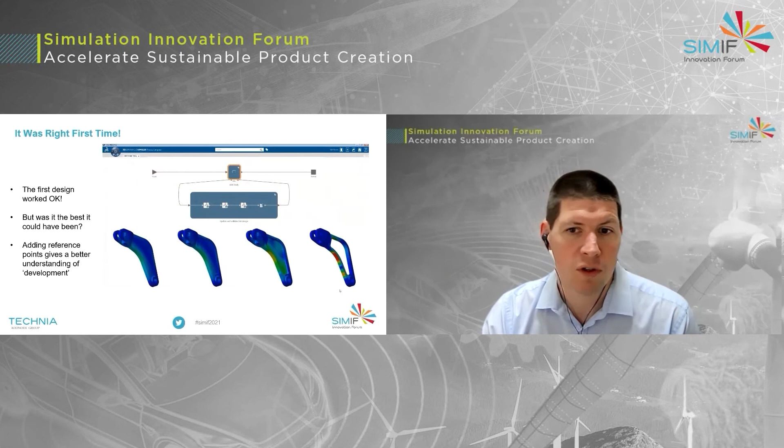Simulation is time consuming. Most engineers think of the traditional approach to simulation, of sending a final design to be analysed once completed. This level of detail means there are more components taking longer to mesh, debug, solve, and then interpret their results. That's the old siloed activity we looked at previously, where someone finishes a design and then puts it over the fence for the analyst to work on the final component.

When we integrate the process, the level of detail is far lower, but more common. This means results can be achieved more quickly and make more impact on the product direction. Looking at this image, it's possible to imagine that the area under each of the lines is the time or cost associated with the effort made. Not having that iterative cycle means it takes longer to come to a conclusion on something, positively or negatively. It may even mean you land on a lesser solution, something that works but hasn't been fine-tuned by these iterations.

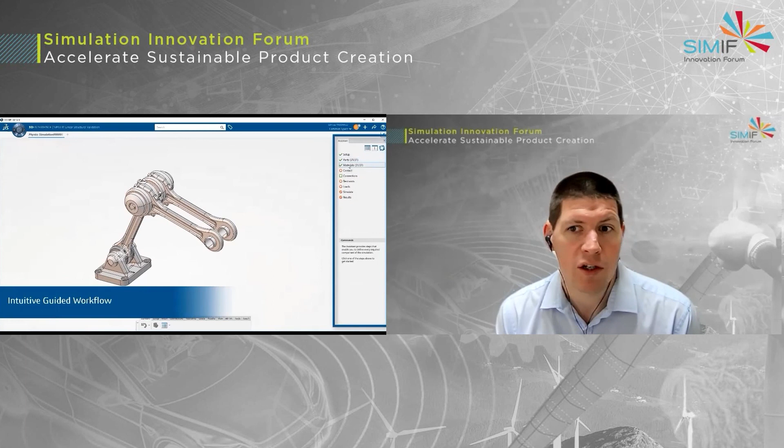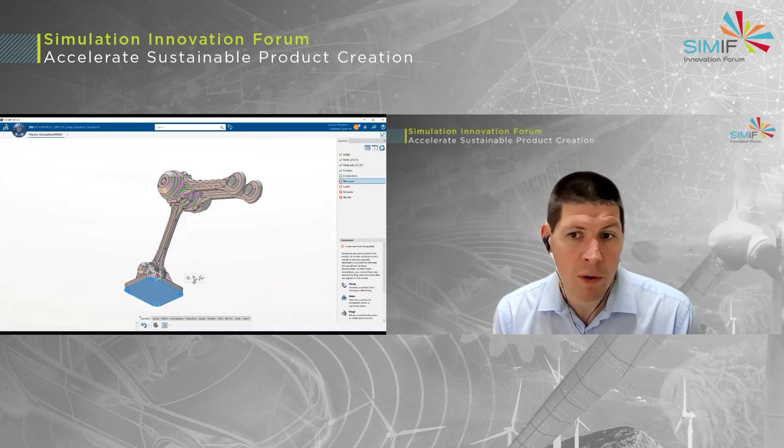Another thought is that simulation requires specialist knowledge. Although this is still the case in some areas, many engineers believe it's still the case in all areas, and it once was. However, software like the 3D Experience platform delivers simulation tools straight to the engineer to use alongside their traditional 3D modeling apps. The level of integration between these tools has improved tremendously, and now you can get seamless interaction, edits, reruns, and other facilities available to each of the engineers, which makes it far easier to utilize the capability and receive useful results. Specialist roles in simulation are still common in situations requiring more advanced engineering for research and development projects, or in this instance, the complexity of final designs and their need for the experience to assess that as a whole package. But it's far easier for the engineer to take some ownership of these early gains.

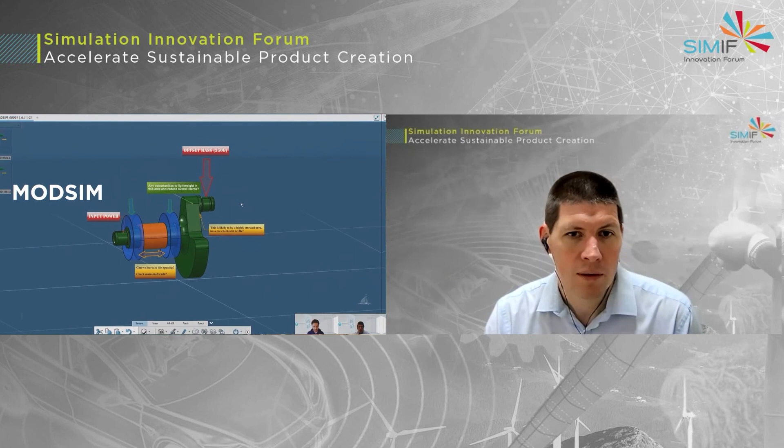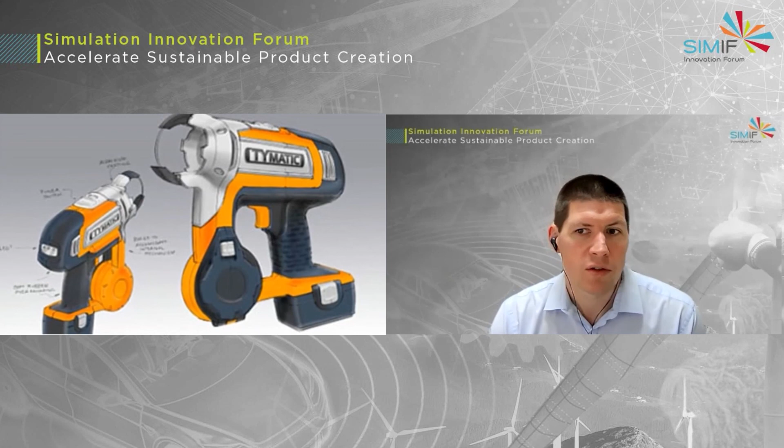As well as software support, within TECHNIA we're pleased to have our own group of design and simulation engineers. With countless years of experience across multiple industries and roles, there are likely very few problems someone hasn't got a history with or a transferable skill to deal with. With our existing customer base, we run a buddy system where each account is designated one of our engineers as their first port of call for support requests. Assessed by their software usage or the type of work they are doing, these customers are linked to the most suitable engineer for their needs.

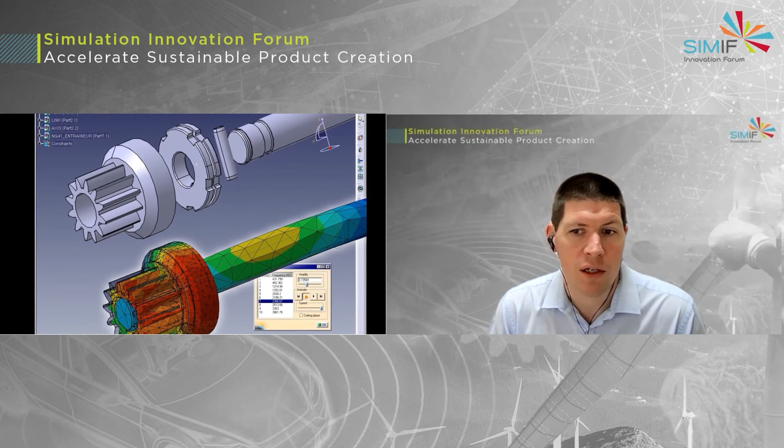Support problems are reviewed with the entire team each week so we can share knowledge and widen the field on certain problems. But ultimately, the benefit of this link means that issues rarely pass this first stage, as there's a more intimate knowledge and trust between the two parties.

One other change we've recently employed is to form these engineering groups into one central team from their previous silos. We found this has had many positives in our day-to-day efforts when running consultancy projects or providing support for our customers. Sharing issues and projects regularly means there is a common understanding of the problems, more heads to come up with solutions, and more appreciation of the effort required for certain workloads.

Probably most importantly for this discussion is that our design bias team have been able to learn some simulation skills and employ those before and during their developments. Clearly, their skills are not as advanced as our power users, but we're continually learning from each other to improve this knowledge and ensure we gain more and more trust in the process and the results.

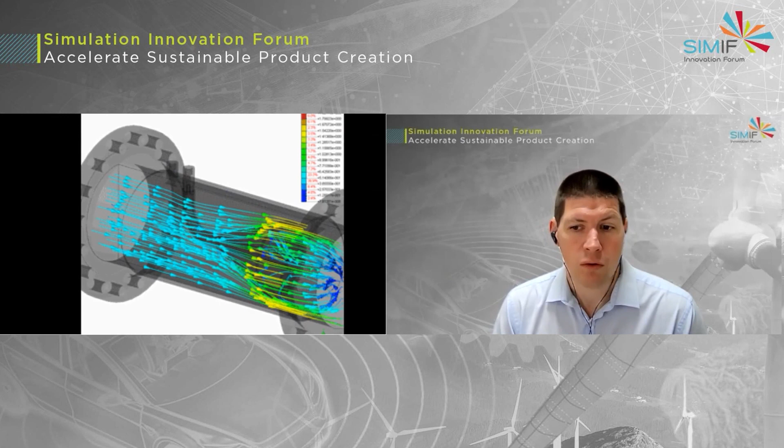We've also found many positives from the alternative angle too, in that our simulation team can now call upon design resource to assist in defeaturing or simplifying models at a higher pace because they're more used to the software. But also our simulation team are learning basic modeling tools on our shared platform as well. It shows a certain overlap if drawn as a Venn diagram, and as that overlap continues to grow, so does the skill set of the engineers and the value of the work being created.

So how can TECHNIA help you? We've talked about why to do it, we've seen examples of what can be done, we've talked about changes, and we've showed what we've implemented successfully here at TECHNIA. But most importantly, how can we help you on your journey? First and foremost, the journey that our engineering team has gone on to develop this level of simulation knowledge puts us in a great position to help you with yours.

We've been through the same changes. We know some of the pain points, the high yield areas, the long-term goals, and ultimately we've experienced what we believe you should be looking to go through. So the next big question is what you might need help with.

Did the product lifecycle look familiar to you? Do you cover the entirety of that or just a portion of it? Whatever area of this you work in and however you may need support, TECHNIA are likely to have the skill set to help you develop more efficiently. Typically, we find that people sit within one of these categories of service level.

Perhaps you have capacity and the correct software, but not the necessary skills. You're keen to develop your team and ultimately take on these projects, but as it stands, you haven't got the skill set to complete them. You either need some training support or some mentoring from our engineering team. We can build the initial works and guide you through these processes so that ultimately you can upskill and take them back in-house.

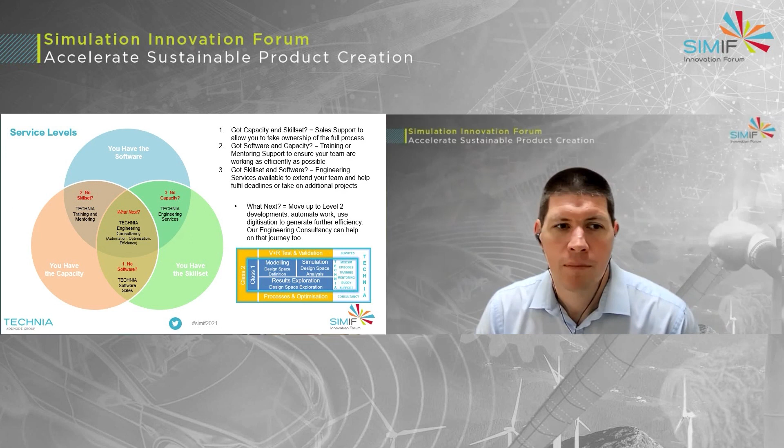Each of these merges with the idea that the typical design life cycle is not so typical anymore, and that many advantages can be had by allowing your digital devices to do more work for you. So what next? Ultimately, most companies will still use a physical test model as their measure of success. Using simulation to mimic this is certainly possible, but not many will invest enough to make this realistic. However, employing simulation-driven design from the outset of the project means that errors are more likely to be caught earlier on, and that means the expensive stage of physical prototyping and testing is more likely to be successful.

Not only does it aid sustainability in reducing material usage and wastage, but with the cost of materials increasing and set to continue, reducing usage will certainly pay back quickly. Perhaps we can help you revisit your approach on your products. It's easy to think they're good enough without continuing to explore how they can be better.

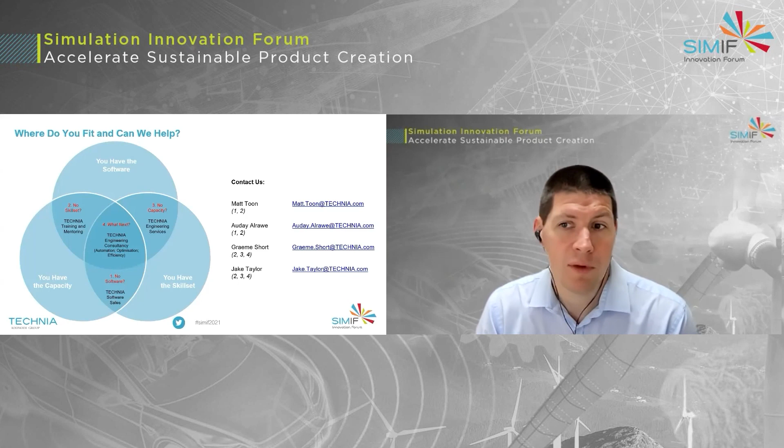I'll leave you with this Venn diagram again. Do you see something that fits your scenario? And if so, select the right number and contact one of our team to see how we can help move you forward.